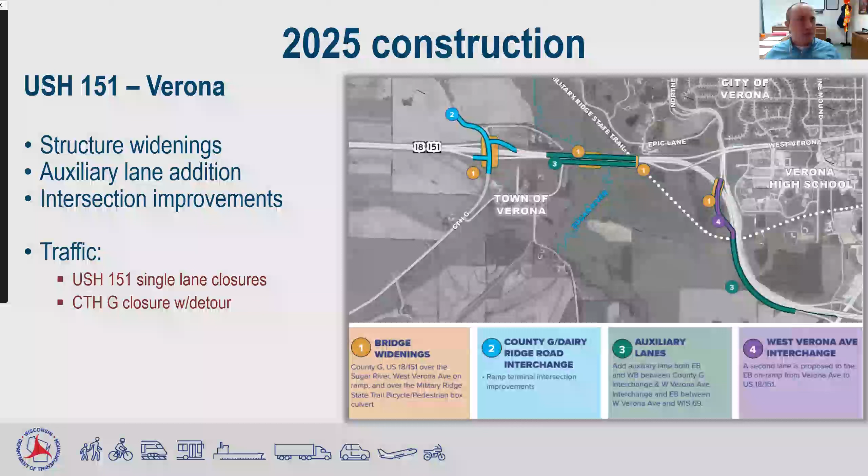So there's really a lot of work out here improving safety and traffic congestion. There will be some single lane closures, and there will be a detour of County Highway G as that project goes. It's a pretty small project, but should have some pretty big impacts to traffic in that area.

We also have a couple projects on the US 51 corridor. This is considered a major project for us. It begins along 51 down by the interstate and goes north all the way up to the Beltline, ending at the north side of McFarland. It's one of the largest projects in the region right now.

It actually consists of 11 individual smaller construction projects occurring over the next 5 years, wrapping up in 2030. It's currently estimated at around $200 million to complete all 11 of those projects.

Two projects were completed recently, as shown in the picture on the screen: the County B/AB roundabout on the north side of Stoughton, which was a really great improvement to increase safety.

We have 2 projects this year in Stoughton, from Spring Road to 5th Street. It's going to reconstruct the roadway and add improvements to bike and pedestrian facilities. There will be a slight detour around Stoughton with that, but local access remains.

McFarland on the north here, we have another roadway reconstruction, bridge replacement, and bike and pedestrian improvements. Traffic's going to be restricted to one lane in each direction for that project.

This is a really big project we're focusing on over the next 5 years. The biggest impacts will be in 2027, with a closure between Stoughton and McFarland. We're increasing safety at a lot of the intersections along that route, and there will be quite a few roundabouts constructed. It's really going to be a much safer corridor after construction is done in 5 years.

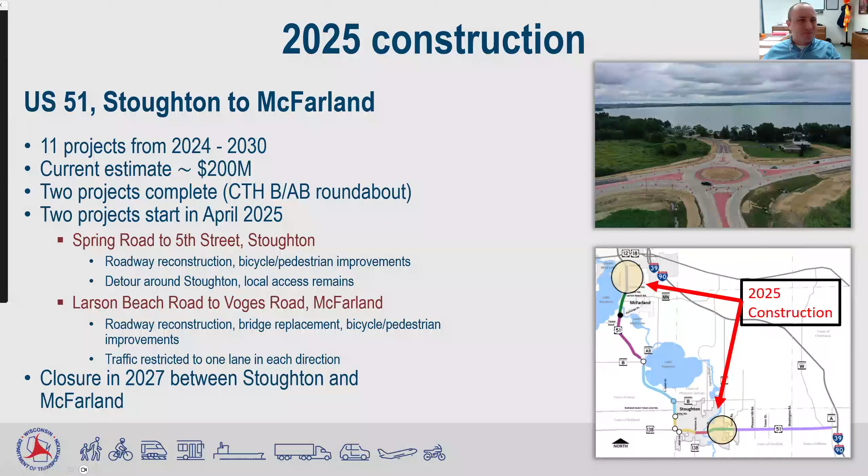Some other big projects we're doing - this one's not really in the Madison area, but wanted to mention it. A lot of folks on this call drive on the interstate north of Madison. This project is on Interstate 39/90/94, located just south of Portage. It's a large bridge replacement project, replacing the bridges over the Wisconsin River.

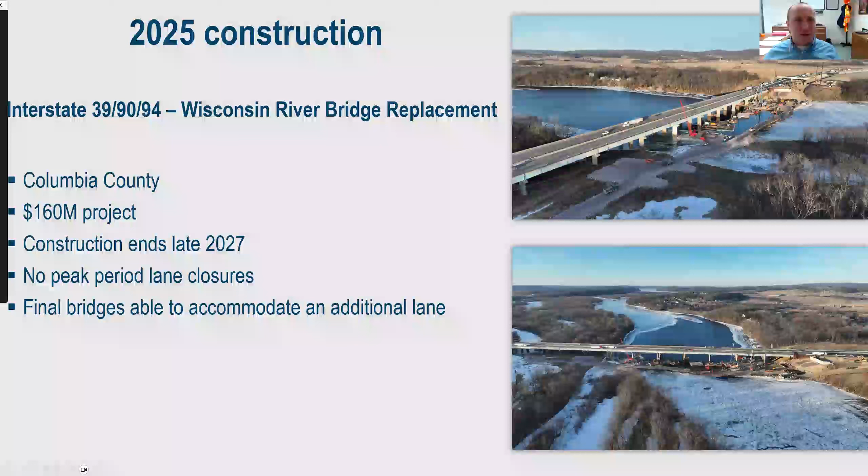It ends in 2027 and is currently ongoing. We have a couple of pictures here of what's currently happening out there. During construction, we're not closing any lanes during peak travel times, but it will be a pretty long duration project since it's a big bridge - a few more years of construction, wrapping up in late 2027. The bridges will be wide enough to accommodate an additional lane in each direction on the interstate, which I'll get into later in my presentation.

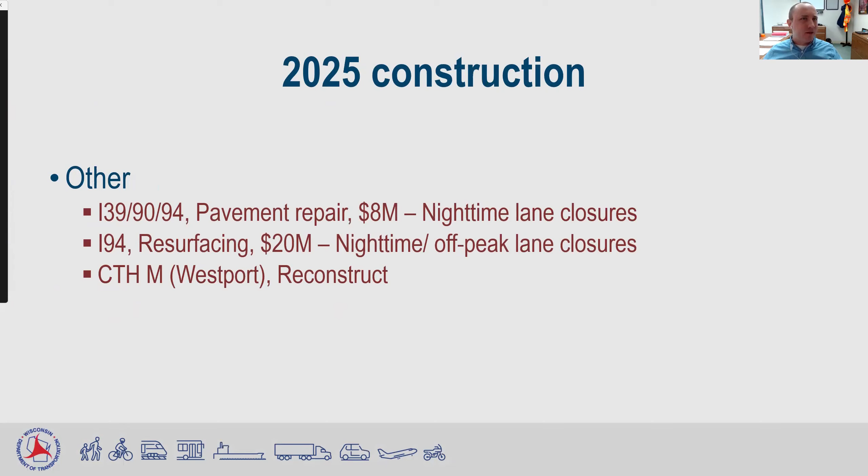Some other small projects we have going on - I'm not going to get into many details here. These are more routine type pavement repair projects.

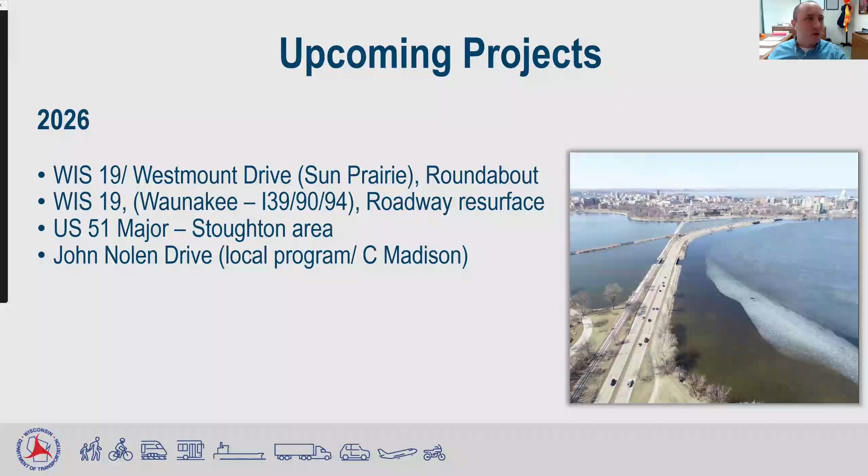Looking out into next year, we have a couple big projects going on. Highway 19 by Sun Prairie - there's a roundabout going in at Westmount Drive to improve safety on that roadway, and a resurfacing project from the interstate along 19 to the west towards Waunakee. The work on 51 continues in the Stoughton area, continuing to reconstruct that roadway. And then, as mentioned earlier, John Nolen Drive, a local program project that we're helping the city of Madison get to completion.

All right, I'm going to pivot here and talk about our major projects within the Southwest region, focusing on the Madison area. Major projects, for general background, are generally our most complex, costly, and potentially controversial projects. We try to limit the controversy, but they are the most transformative type of projects we have. The current definition is for projects with costs greater than $128 million.

We just went over a few of those currently in construction - the Wisconsin River Bridge, US 51. We also have a few more in the Madison area that are in the very early stages, which we refer to as a study. These projects are large and take many years to complete. The studies are really the future transformative projects of the 2030s.

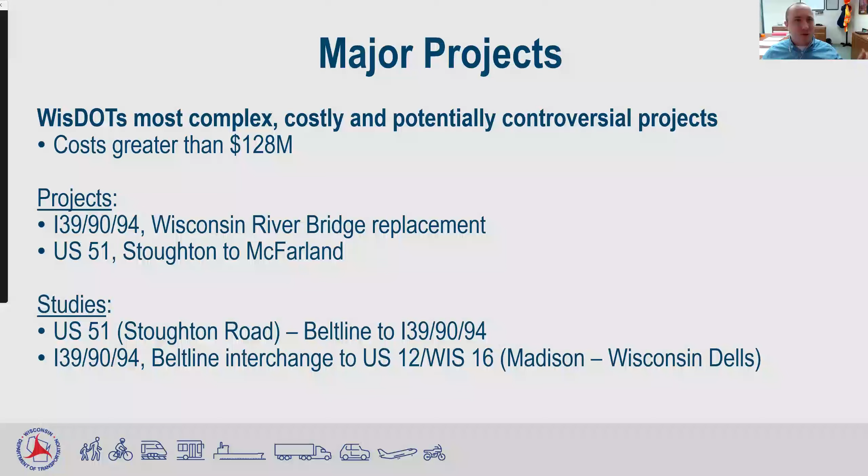Looking out, we have two studies in the Madison area that I'm going to talk about - one on Stoughton Road on the east side of Madison, and another along the interstate from Madison all the way up to the Dells. Stoughton Road is the first study I'll talk about.

The main issues along this corridor are safety, traffic operations, and bike and ped connections. East Washington Avenue is a very unsafe intersection - it's the primary culprit of our safety issues along this corridor and was a large focus of this study. We went through rounds and rounds of alternatives with the city of Madison and got a lot of public feedback. The study is just completing the environmental analysis. We've developed an alternative that improves safety all along the corridor, mostly at the intersections.

As for project schedule, we have our public hearing next month to get public comments on the alternatives we've developed. Any potential construction would occur at earliest in 2029 or later. The cost is approximately $180 million for this project.

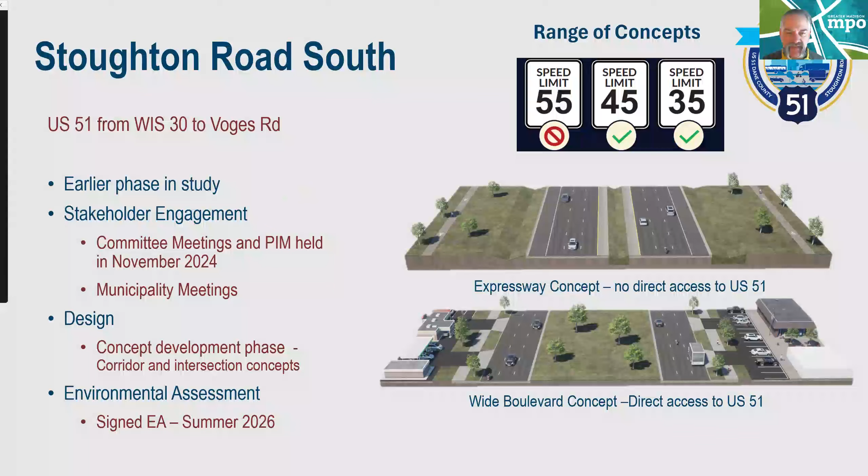On the North project, particularly north of East Washington Avenue, there had been a lot of discussion in some of the stakeholder groups, the tech committees, about continuing that separated path past the airport. Last I heard, the airport board had pushed back on that. Can you give a status update on that, please?

So we had to move forward based on our schedule for the study. It would have taken a long time to get through that, and the airport did say they were not interested in us pursuing that or allowing us to have a path there. So we did move forward, Ben, without that. We did what we thought was best and included a trail system up and connecting through Portage Road. Great, thanks for that update.

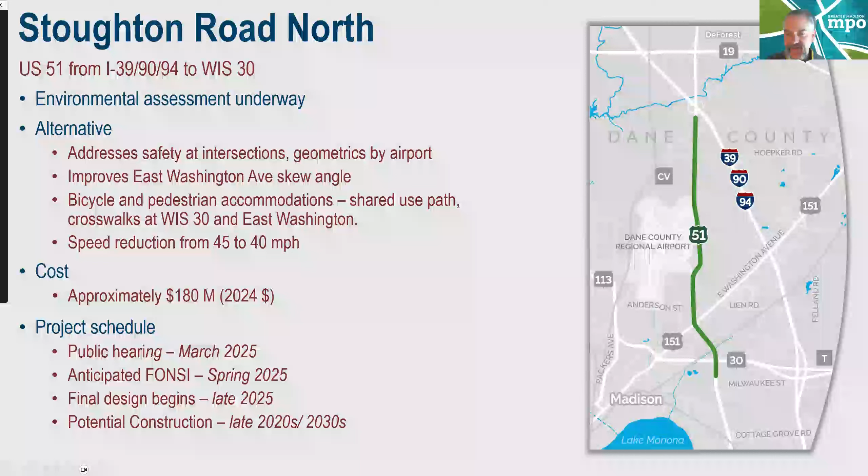All right, so this is the final project I'm going to be talking about today. It is the Interstate 39/90/94 study. This study begins on the south side of Madison at the Beltline interchange, just north of the Beltline interchange, and proceeds north along the interstate through Madison, up by Portage, and terminates on the north side of the Dells. It also includes a stub of I-39 just south of Portage. So it's 67 miles in total - it's a very long study.

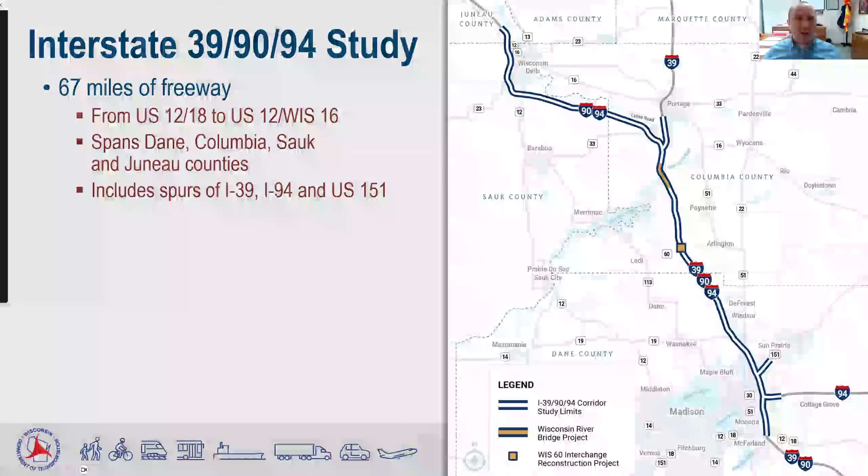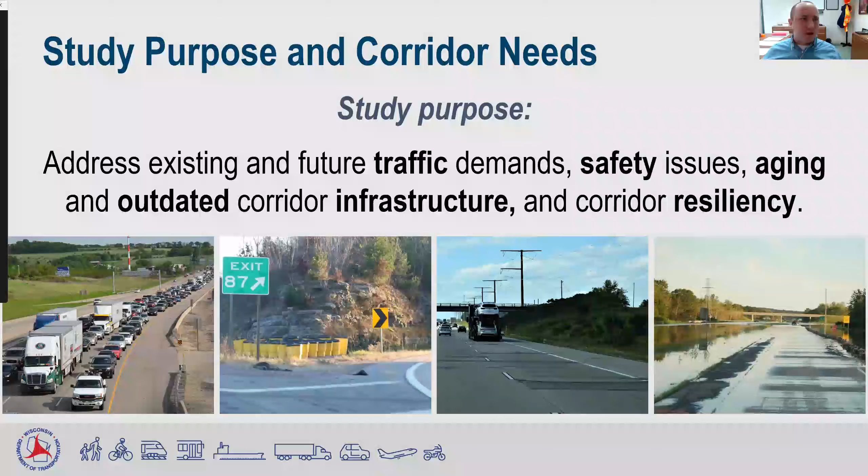And there's also a lot of interchanges along the corridor.

Highway 151 is the biggest one I'll talk about today. There's also two potential new interchanges with the interstate at Hoepker Road and Milwaukee Street in the Madison area. So the interchanges are locations along this corridor where we have frequent safety issues, traffic backups, really key areas that we needed to get public input on throughout this project.

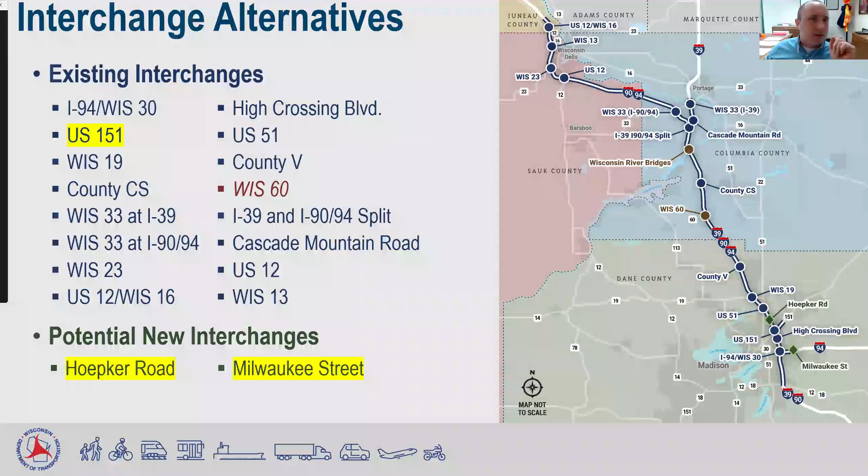Interchange at Milwaukee Street. This is one of the potential new interchanges from the interstate study, just east of Madison on Interstate 94. For those familiar with the area, it's just east of Sprecher Road, shown just off the slide here on the left. It's very close to the Badger interchange where 94 comes in, so we have some loop ramps here to get this interchange as far away as possible from the Badger interchange.

We looked at this request from the city of Madison. It's been in their long-term neighborhood plan for a number of years, I think since 1998. We're studying it now, and we think we have a really good alternative here that meets traffic demands on our interstate main line as well as satisfies the needs of what the neighborhood is looking for here.

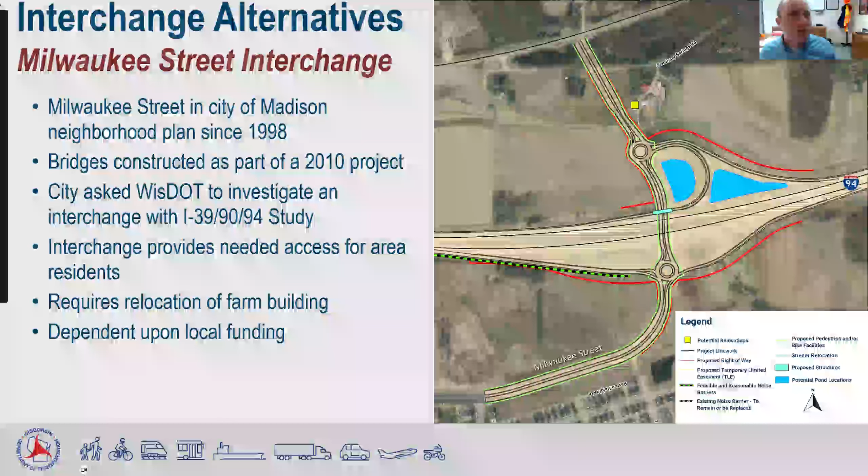There's another potential new interchange along the interstate, this one at Hoepker Road, on the north side of Madison. This is a standard diamond interchange, so it looks a little bit different than the Milwaukee Street interchange.

This one is located just to the south of US 51 and just to the north of 151. We also looked at this at the request of the city of Madison. It's really to provide better or increased connections to the American Parkway area. Hoepker Road is also a major regional connector, going all the way to Sun Prairie on the east and connecting into 51 on the west. So it's a major regional connector and it will provide better access to the American Parkway area.

On this one, we will have signals at the terminals, and also off the screen here at Portage Road and Hoepker there will be a signal there just to help traffic get through the area and not back up to the interchange.

Let's see. So I do not have an overview of the 151 interchange up, but I want to mention that as well to this group. Sorry, I think I saw it, it was before the other two interchange pictures, okay. I think it just got skipped over here. All right. Okay, it is in there. Thank you.

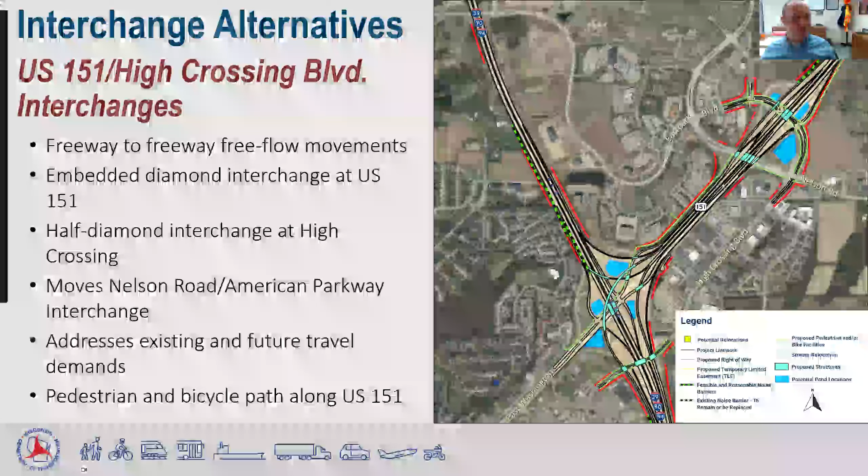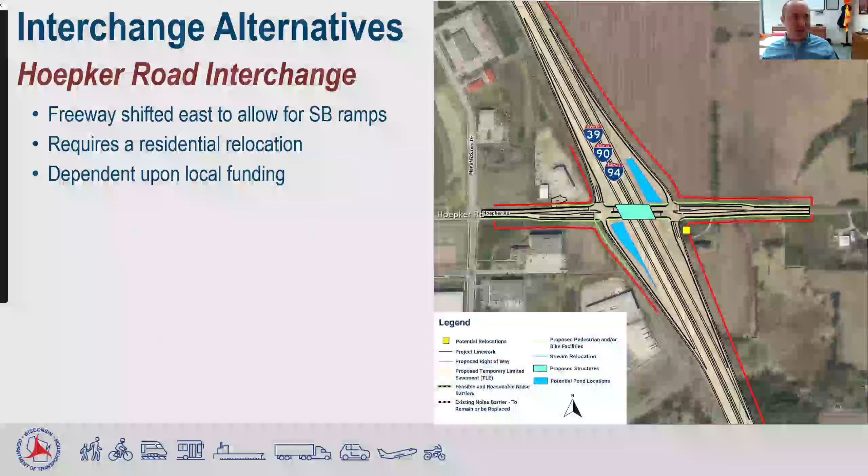Okay, so overall schedule. There's a lot to this project. It's 67 miles. We're fixing a lot of the needs along the corridor. The interstate was built in the 60s. There's a lot of things happening up on the Dells, similar to the Madison area. The interchange is getting reconfigured. It's a big project.

So we finished our environmental study. We were completing the environmental impact statement, and that finished in December of 2024. We've reached our final environmental impact statement and record of decision, signed by Federal Highways.

We took that through a specific budgetary process these major projects must go through. A big hurdle for that was taking it to a Transportation Projects Commission. It's a 15-member commission, and they recommended it for enumeration into the state budget. That was actually in December of 2024 as well.

So there's a couple big hurdles yet with the project to get to final design and ultimate construction. Construction is ultimately dependent on funding, so we're waiting on a couple big pieces to begin final design along the corridor. The earliest potential construction is, again, dependent on funding. I think the earliest we're thinking is likely the 2030 timeframe, thereabouts. Some projects could go a little bit quicker, but it takes quite a bit of time for a project of this magnitude.

So that completes the interstate study. I'm guessing there might be some questions on that. We'll get through this next few slides here, and then my presentation will be over, so we can open up then.

So some useful tools. Every time I present to a group, I like to take an opportunity to go over some useful tools that are available, just for awareness. One is a safety dashboard called Community Maps. It's a GIS-based system that maps all the crashes that have occurred on our roadways within Wisconsin, and it's linked to police reports. It's probably of interest to local communities and similar groups.

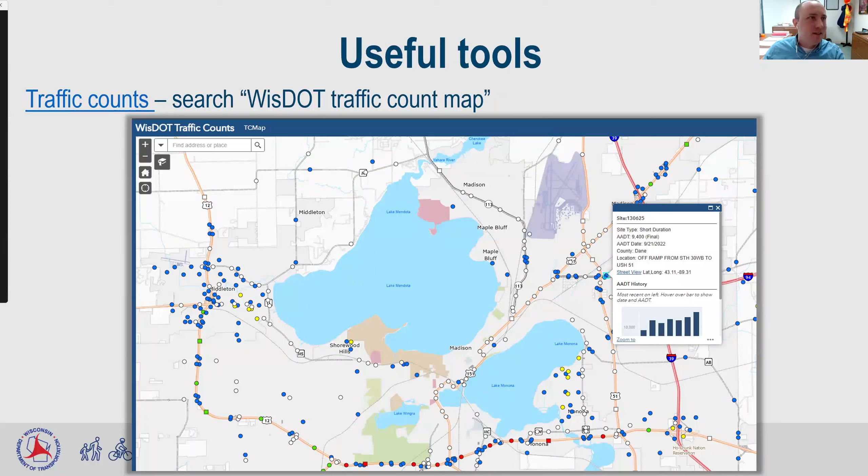We also have, many of you are probably aware of this, a tool for interactive traffic counts. And then this one is probably the best one—a GIS map that shows our projects over the next six years. It's interactive; you can click on these links and see what type of project it is, how much it costs, general ballpark, as well as project contacts. So if you have a project adjacent to a location of interest of yours, you can click on it, get project details, and reach out to that project manager.